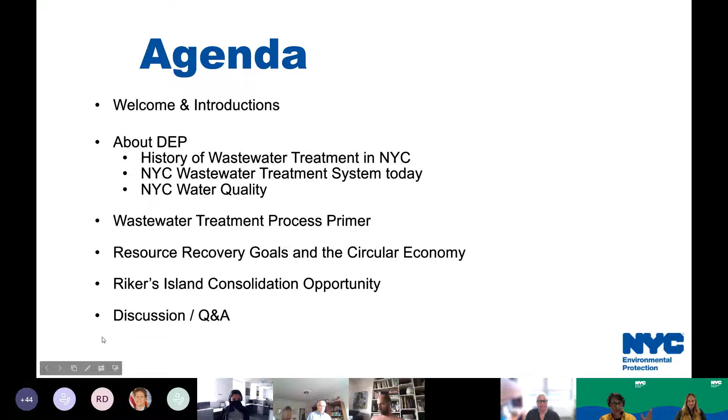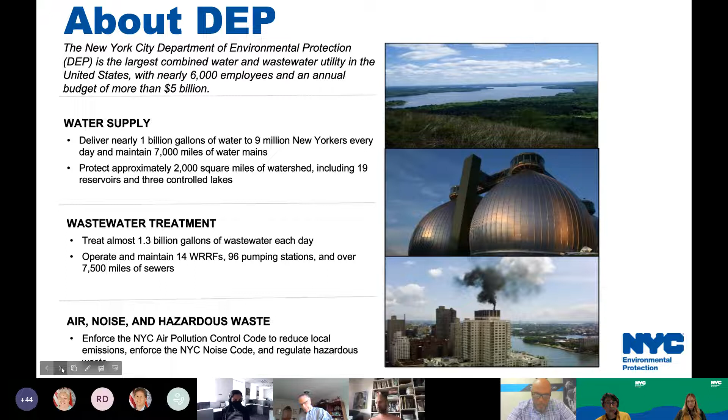Let's go. So a little background about the Department of Environmental Protection in New York City. We're not just about wastewater, and most people know about us as a water supply agency. So we do bring the clean water from upstate to New York City, an amazing feat that's been going on for 150 years, and about 100 plus years worth of wastewater treatment. And that is the niche that we fill here, and I'll talk about that in a lot more detail. But just to round out DEP, we also enforce air and noise and other local environmental codes for the city at large. We're about 6,000 people in total. 1,800 of that is the wastewater division.

Real basic, why do we treat wastewater? Well, first and foremost, we are a public health agency. Here's a short list of diseases that are prevalent if you don't manage wastewater properly. I like this little graph because on the bottom it shows general death rates per population of 1,000: Berlin, Paris, New York. And then New York City actually was a leader in typhoid deaths in the early 1900s. And this is the reason we started to build wastewater infrastructure.

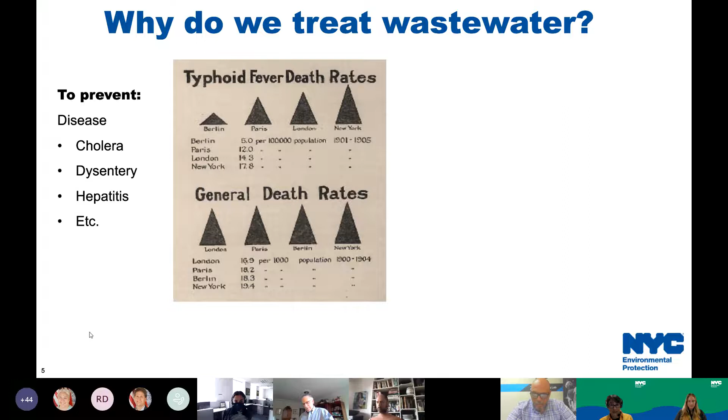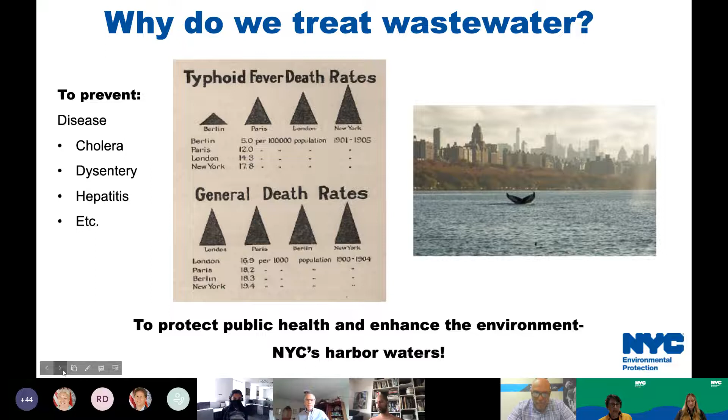And we've taken that further, not just preventing disease, but, if you click, we'll get something else, which is really to protect public health, like I mentioned, and enhance the environment. And that environment, the recipient of this work, has been the New York City harbor waters. There's actually whales and other marine mammals coming back to our waters. It's a testament to the work that the collection and treatment of wastewater has done, in that it has been able to reestablish some of an ecosystem that was lost long ago, to create an environment so that these healthy creatures want to come back and live with us in our adjacent waters.

Okay, so a little bit of history. You can imagine, before there were treatment plants, there were people. And when people lived in dispersed populations, managing wastewater was not that big a deal. People can stay away from a wastewater deposit, so to speak. But when people started living together in cities, it became a problem. Not only did you have human waste, you had horses, animal waste, cows or whatever you may have in a city, and there was a lot of contaminated water because of that.

And so the early sewers, not just in New York City but in any city actually, the original wastewater systems were just to put pipes in the ground and get it away from people and get it to the nearest water body. Totally made sense. Get it away from people.

We determined that it was a disease-causing problem, and that worked great until there was enough of it that the nearest waterway was not a solution. And over time, that polluted water became noticeable and became an actionable item. So in 1897, I believe, was the first time the city put in a treatment plant.

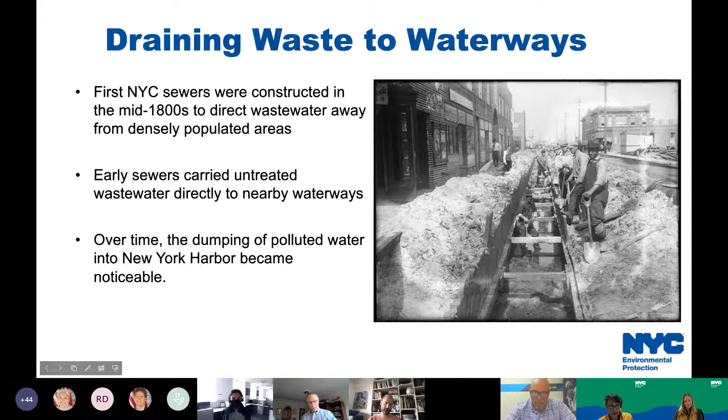So we did put a new plant in 1897, but the first beginning of our sampling of the harbor waters was actually in 1906. And that means we've got almost 120 years worth of water quality data. And the data from back then found numerous dead zones, nowhere close to the ability to support a marine ecosystem the way it does now. So back then, at the turn of the previous century, is really where the city started to think about how we're going to treat and manage sewage.

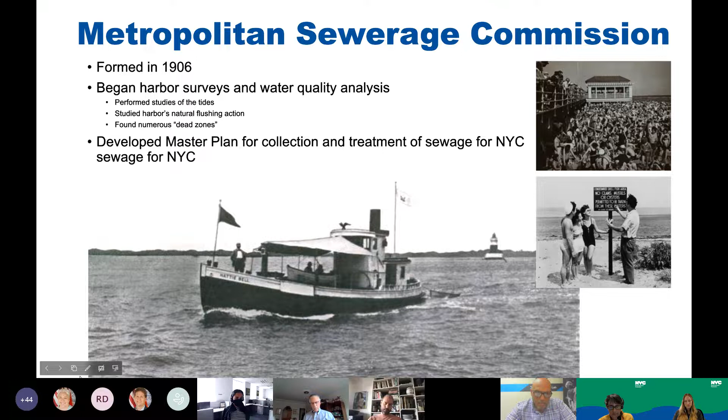And then it became a plan. In 1886, I stand corrected, we started to treat wastewater for the first time. Coney Island, the places where people like to go swimming, was the first target for obvious reasons. The earliest treatment plants were basically retention, a little bit of settling, and disinfection. And that made a huge difference. It helped disrupt the pathways of disease to humans.

So that whole area of Jamaica Bay, or the south end of our service area, was the early target, well before anybody thought about the Clean Water Act or anything like that, entirely driven by prevention of disease and preserving public health.

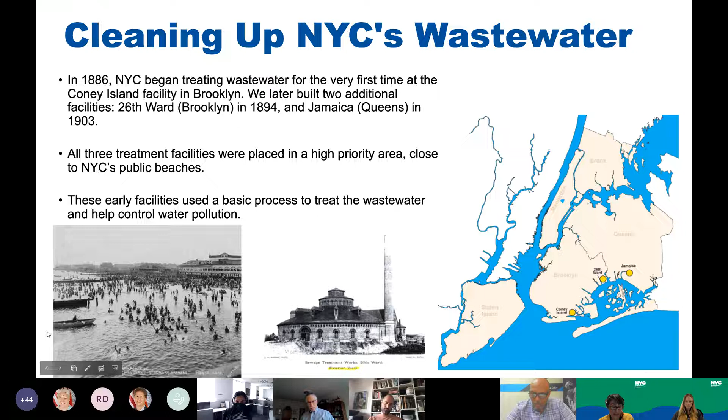I mentioned that the early wastewater infrastructure was just getting the pipes in the ground in order to get contaminated water away from people. And when we built the treatment plants, and this is the same of every city in the world that was big enough to even put drainage in the beginning, the treatment plants were built to collect from that existing drainage system.

And therefore, I'm sorry, I'm hearing some background noise. And therefore, we have a combined sewer in much of New York City, which means not only do we take the flow from homes and businesses, the typical wastewater flow, but about 60% of the city, if not more, is combined in that it collects flow additionally from streets, runoff from streets. So that is a remnant of the collection systems that were put in early.

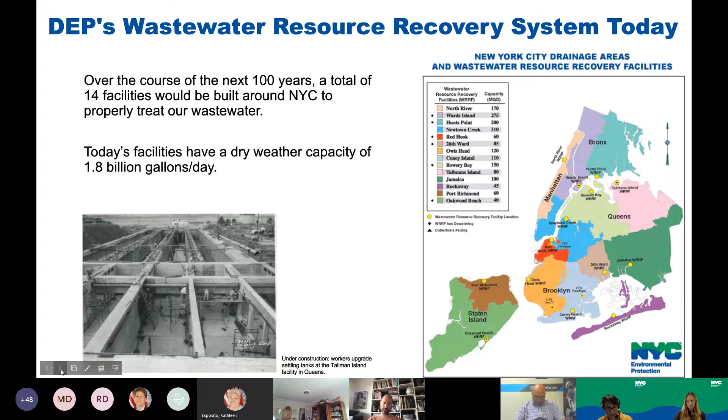So today, I talked about the 14 facilities that we have. We're the biggest wastewater utility in the United States. We have about 1,800 people, except for the fact right now we've got a lot of vacancies, so we're quite a bit less than 1,800. I think we have about 200 people vacant.

We have, and I'll talk a little about dewatering facilities, what that means. We shouldn't ignore the fact that we've got to get the flow to the treatment plants. And so therefore we have 96 pumping stations that are part of that extensive collection system. I should mention that there's over 7,000 miles of wastewater pipes in streets. And we also have a number of regulator stations, almost 500. These are points that actually help regulate the flow and get it to the treatment plants, and also are potential areas where we would overflow if we need to in very high storms.

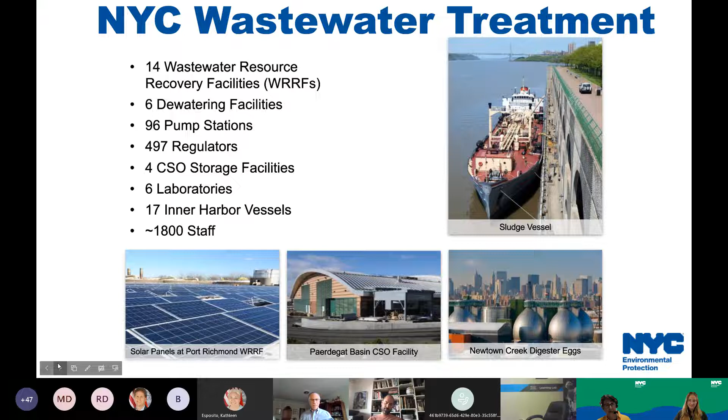We also have a series of combined sewer overflow storage facilities as well as laboratories. And I'll talk a little bit about these inner harbor vessels, these boats that we have in the process. I can't remember if we talk about that later, but I will if it doesn't come up again. But it's a little unique thing about New York City. I say that I have my Navy here, because we do utilize boats to transfer some of our solids to the final treatment for dewatering.

We're blessed with over 100 years of water quality data. If you look at the data from the 1960s to today, you see a big change in fecal coliform levels. There are other parameters we monitor for too, and we could do the same thing for dissolved oxygen, which is a health indicator for receiving waters.

It was a big problem in the 60s. The early plants were targeted to Jamaica Bay for primary contact with individuals. In the 1930s, a number of other plants were built, and finally North River was the last plant constructed, in the 80s. It took a long time for treatment plants to get up and running and change the dynamic of receiving water quality. The Clean Water Act passed in 1972.

The difference between 68 and 85 is the federal mandate to treat wastewater. And it wasn't just to treat wastewater, it was to treat it to secondary standards, which include not just a physical treatment process and disinfection, but added a biological treatment process that actually consumes organic waste from the waste stream. That made a huge difference between the 70s and 80s, and you see the improvements continue over time.

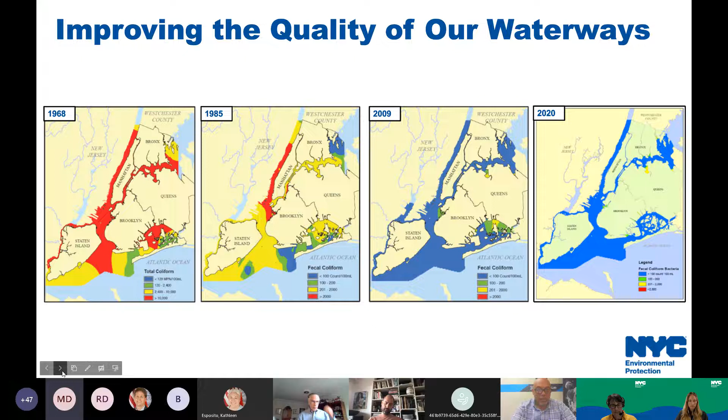So let's get into the fun stuff. My goal here is to make all of you wastewater enthusiasts by the time we close this Teams meeting.

Like I told you, I asked people who's used the toilet today. My goal in life is that everybody knows what happens after they flush, because it's important for your public health. It's important if you understand what you're paying for in your rates for water and wastewater management. It's important for you to appreciate what is done, and it's important for people to understand that we take care of it so you don't have to.

For everybody on this call, if you have not actually visited an operating wastewater resource recovery facility, you are all welcome to do it, and we will set you up with a tour. We have 14 to choose from. Newtown Creek is the one we use most frequently because it's kind of set up for visitors, but it's important to get the look, the feel, and the smell of a wastewater treatment process.

I'm going to talk a little bit more about odors in a minute, but I wanted to give you the very high-level description and get into a little bit of cool detail.

So we are a factory. This thing that sits in the middle is a factory. And like every factory, we take in raw materials, inputs. Our inputs are residential and commercial wastewater, industrial wastewater, and stormwater for a big chunk of the city. That goes to this treatment plant, which is the processing manufacturing facility.

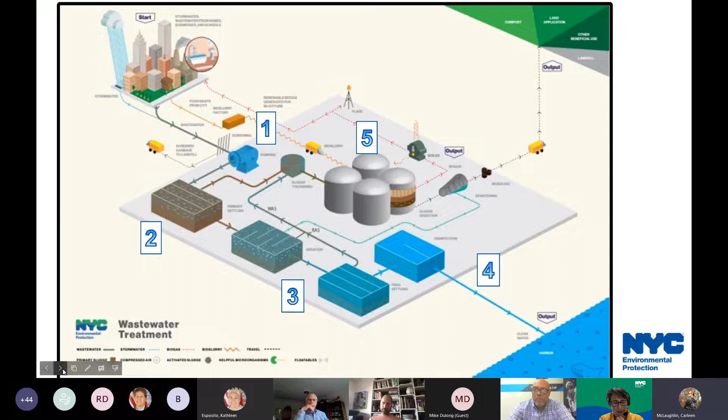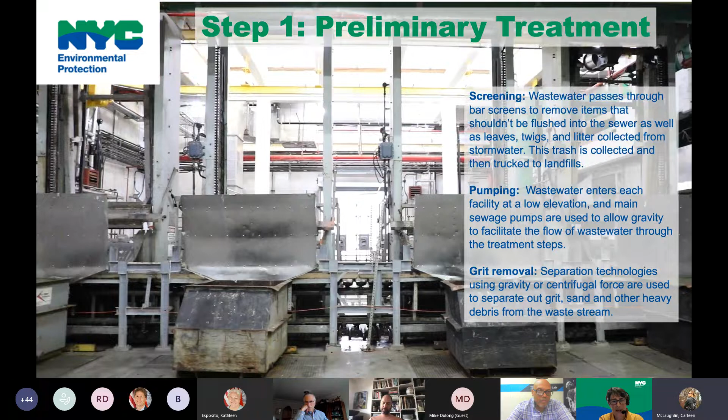Okay, so I don't think we have sound, which is probably a good thing. I talked about that first step, which is screening. We have bar screens, and the bar screens are basically that - they're bars - and then we send these rakes down.

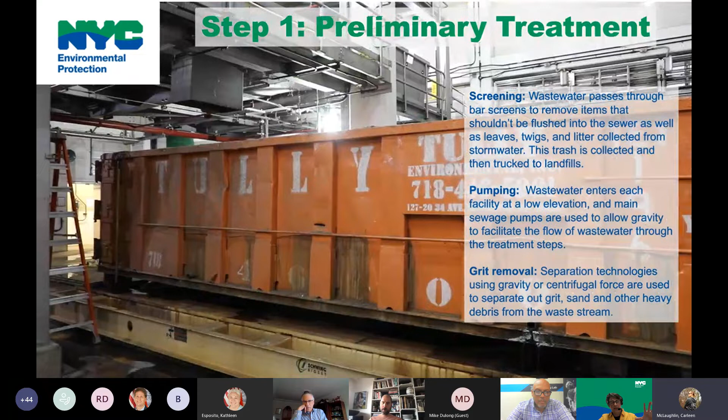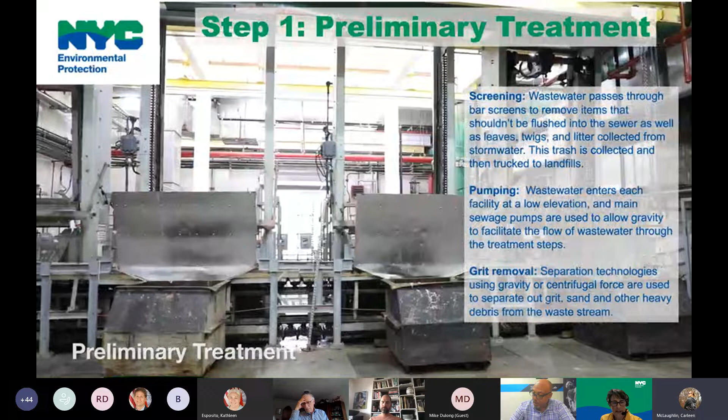This is the influent that comes to this low-level tank. There's the bar screens, and the rakes will come and scrape the debris from the bars and dump it into this conveyor system. And you just - if you look closely - it's impossible to miss. That is what gets stuck in the screens.

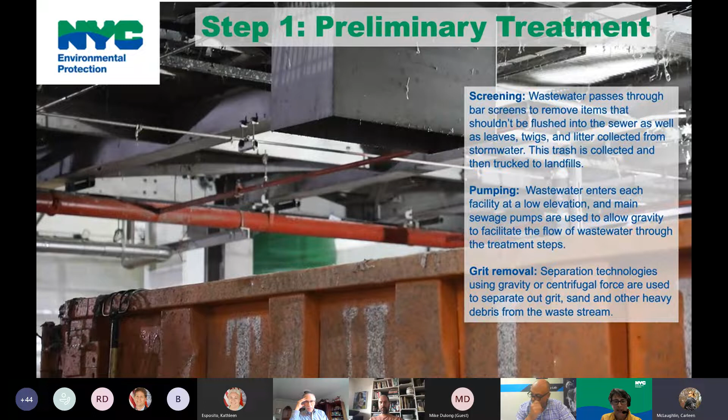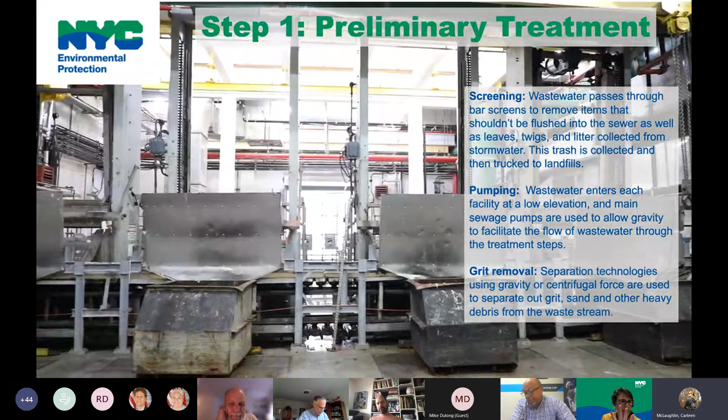80% of that is quote unquote flushable wipes. If you learn anything from our time today, you and all your friends and family will only flush 4 different things. Okay, everyone paying attention? Get your pens out: poop, pee, puke is okay, and toilet paper. No other kind of paper.

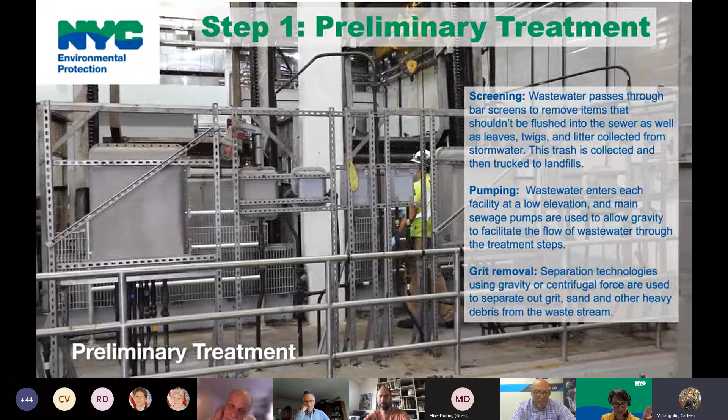But Pam, does facial tissue break down just like toilet paper? Guess the answer - no. Paper towels, no. Baby wipes, no. But it says flushable on the box - they lie, it's not flushable. It gets out of your toilet, but it does not break down in the system. We're having a big fight with people who produce flushable wipes.

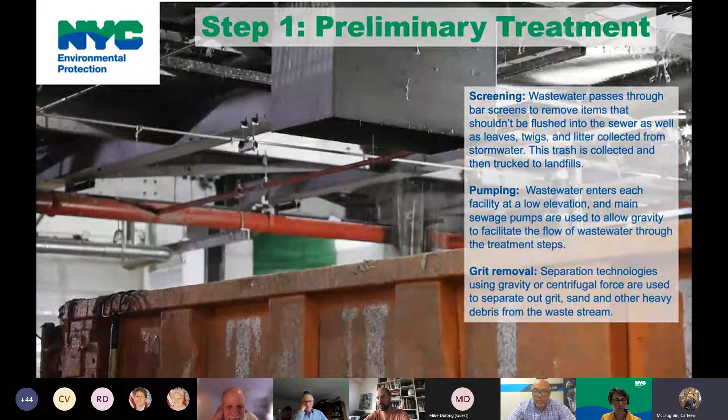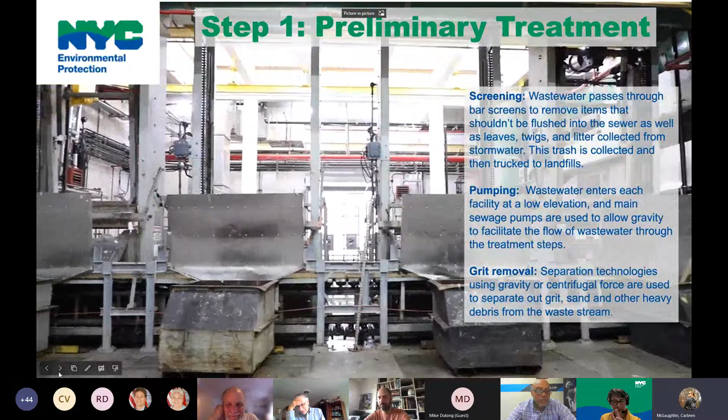So enough of that. Y'all need to see this in real life, and only flush the 4 Ps. If not, I will send you to this treatment plant to pick out everything you flushed. It is not on that list of 4 things.

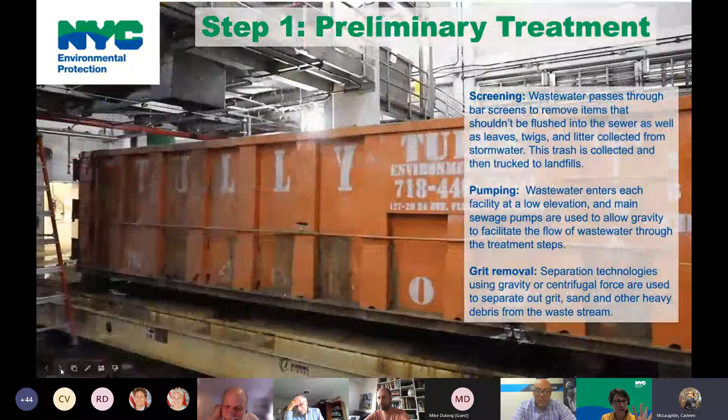But Pam, what about floss? Is floss on the list of 4? No. Floss gets tied up with this stuff. Okay, I'm a wastewater person. This stuff is nasty. Don't do it.

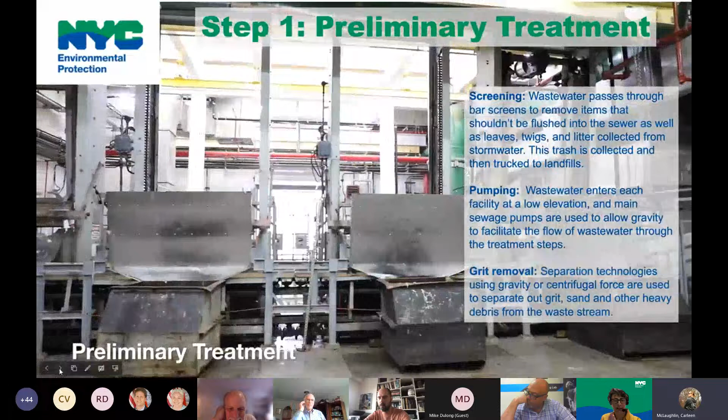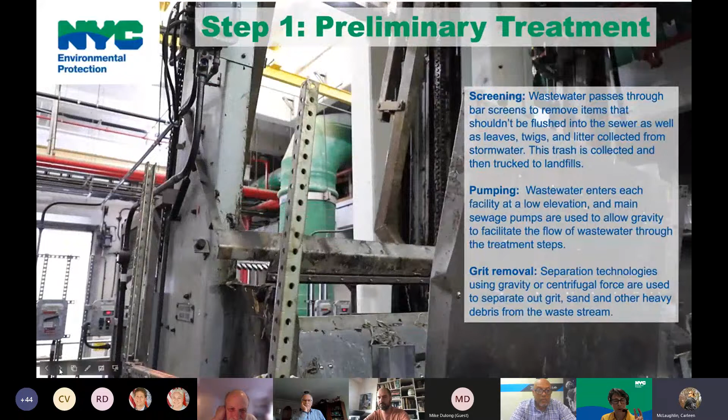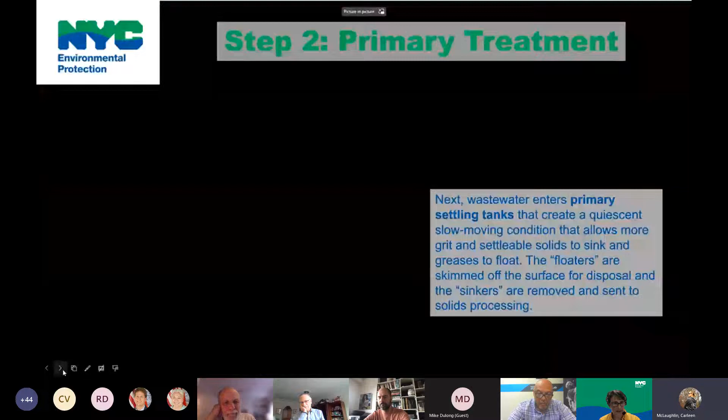I think it goes to step 2, next slide. Those videos are working well.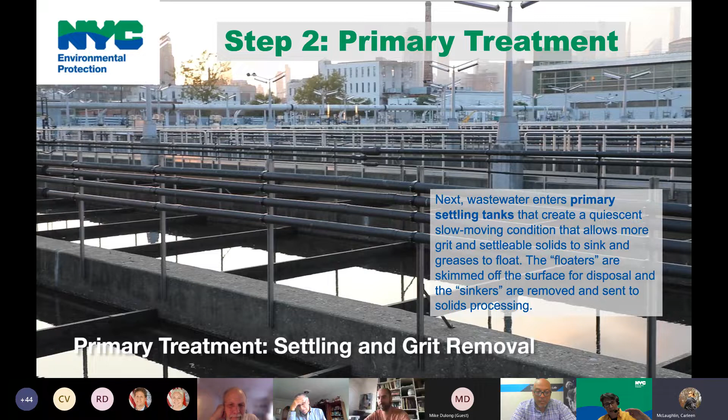I mentioned this, primary treatment. This is the first stop, and they're just long, narrow tanks. It's a slow-moving environment that allows the greases, the floaters, and grit, settleable solids, inorganic solids, to sink to the bottom of the tank. Then we have these scrapers that move along and take out, move the grease off the top and the grit off the bottom. That little end is the grit removal. It's not really primary treatment.

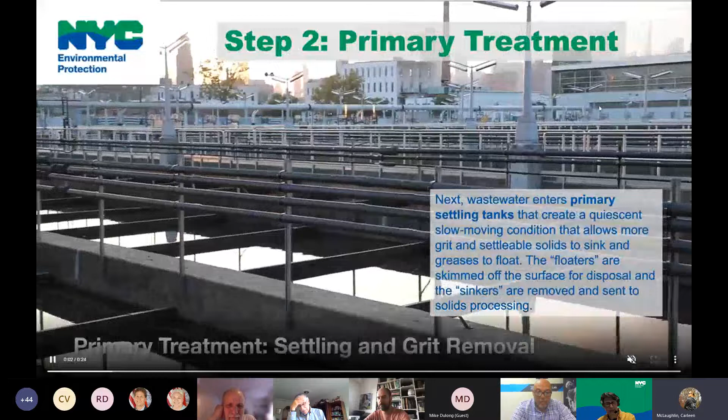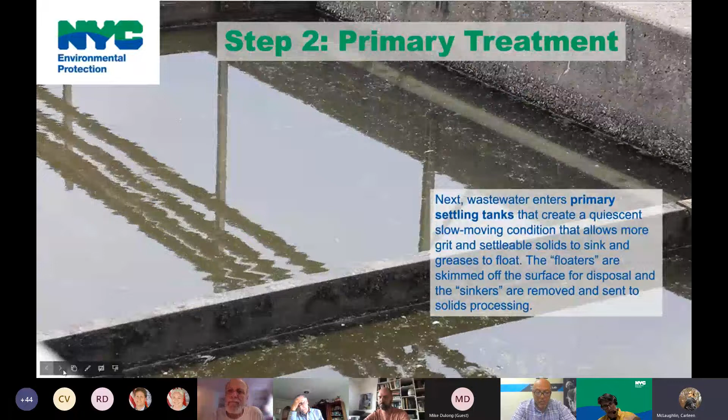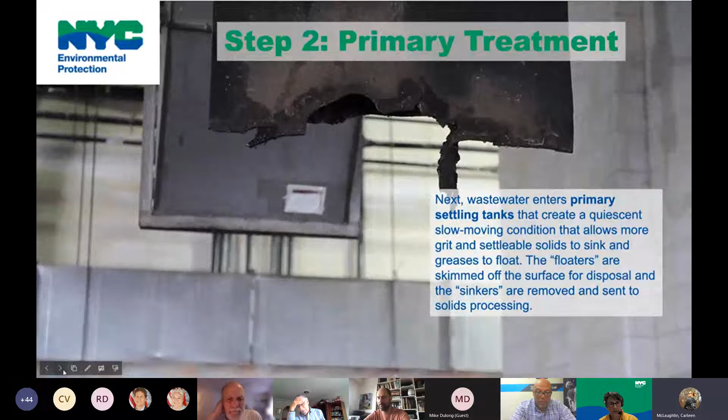But anyway, when I talked about those first plants that were built in the late 1800s, they basically were this. They were like simple primary, probably a lot smaller than this, a primary treatment tank with disinfection that did an okay job for the day when they put those in. But next slide, they're more primary.

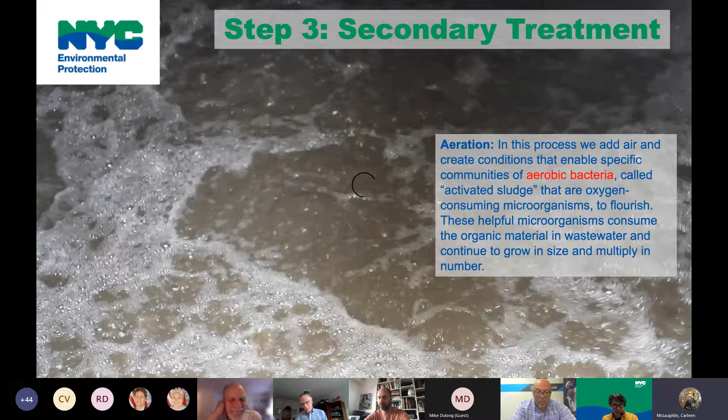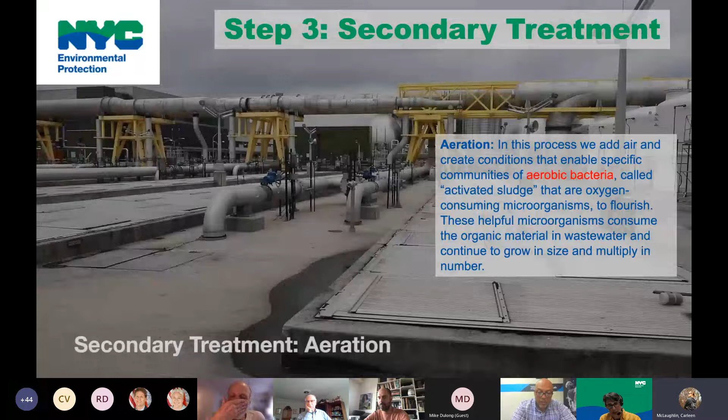Okay, so now we're getting to secondary treatment. This is what's amazing. Think about this: if a bear poops in the woods, what happens? There's soil, there's nutrients from the leaves falling and the foliage around it, there's oxygen. Over time, depending on the conditions, that poop becomes fertilizer for the forest. It's brilliant. There's nutrients, there's air, there's bacteria.

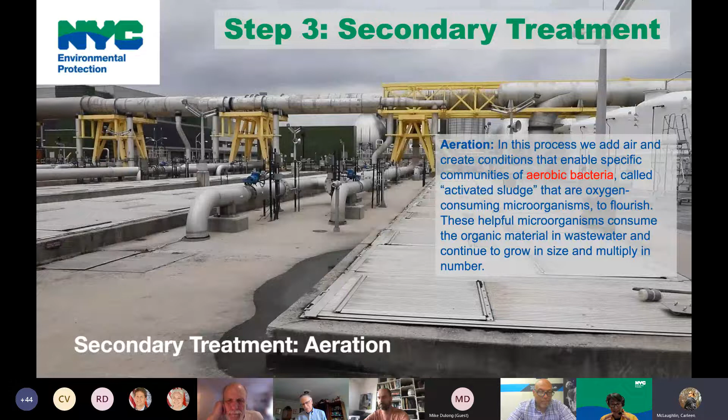So we basically take those same ingredients and control the environment through air, through retention time in the tanks, through the concentration of microbiology in the tanks relative to the food, the waste coming in. We do that process just like a bear poops in the forest, but in a matter of hours instead of days or weeks, ultimately ending up in the same place: we take that organic material and break it into a usable compost and a green gas.

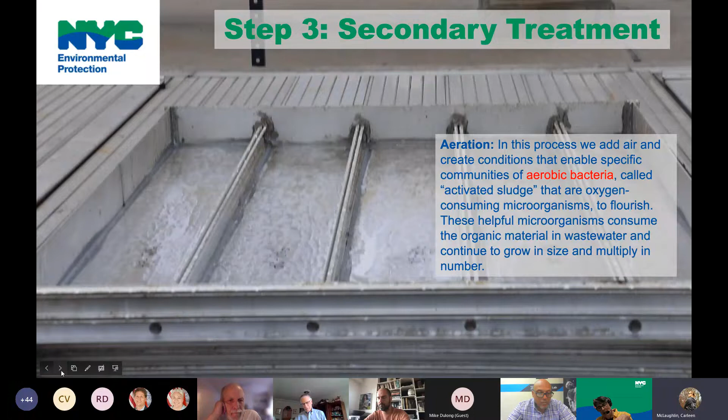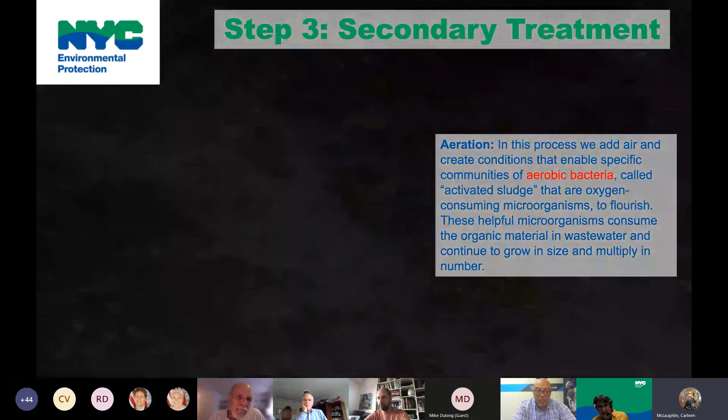So this is really the heart of the secondary treatment process. It's quite amazing when you think about it, people being able to figure out that we could speed up Mother Nature by engineering it in.

Next, I'm going to try and speed up because I don't know if people are getting bored. This is a real cool picture of the bacteria that work for us. Again, we set the conditions so that these beneficial bacteria show up and do the job. I don't think the video is working, but it's very cool.

When you go to the treatment plant, you should also go to the lab, and we should send you a video of this. This is the bacteria, we call it sludge, activated sludge, that mixes up and treats our waste. Next.

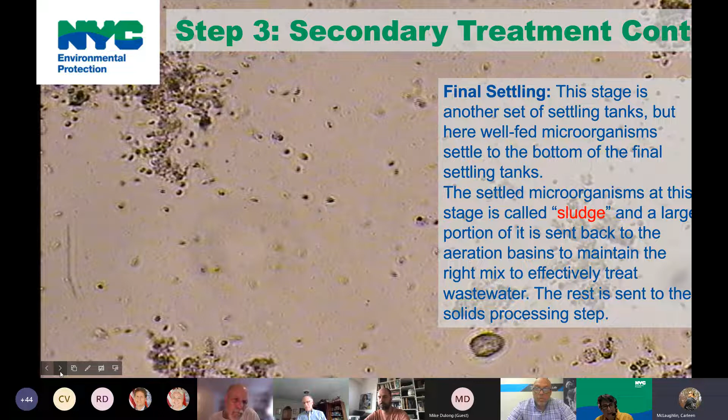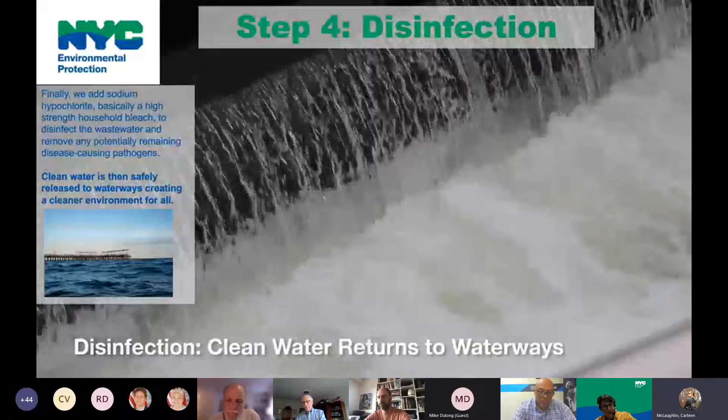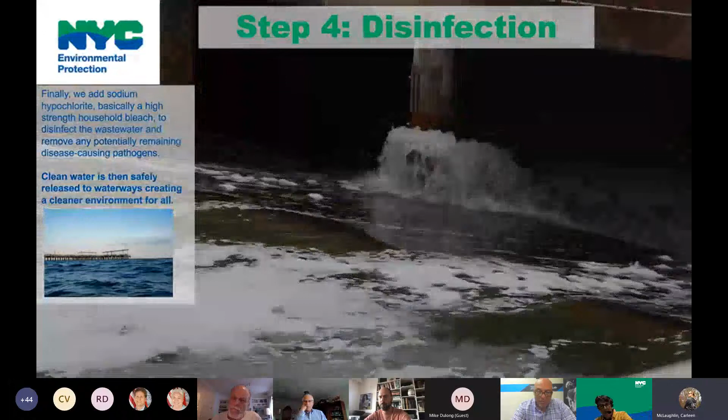And then we go to disinfection. There are some pathogens that may be remaining in the final water. After secondary treatment, we settle it out and take the water off the top, which is this clean stuff. We just add a little household bleach, basically household bleach strength stuff, and send out the final clean water. The solids off the bottom of final tanks either go back to the secondary aeration basin to use the bacteria over again, or go into the solids treatment process.

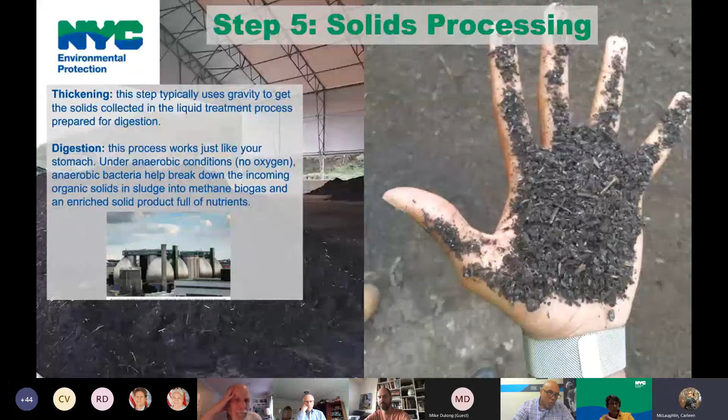Next, I think we're going to talk about solids processing now. These are digesters. If you've been to Newtown Creek, you've seen them. If you've driven on the LIE, you've seen them. These work just like your stomach. There's no air in them.

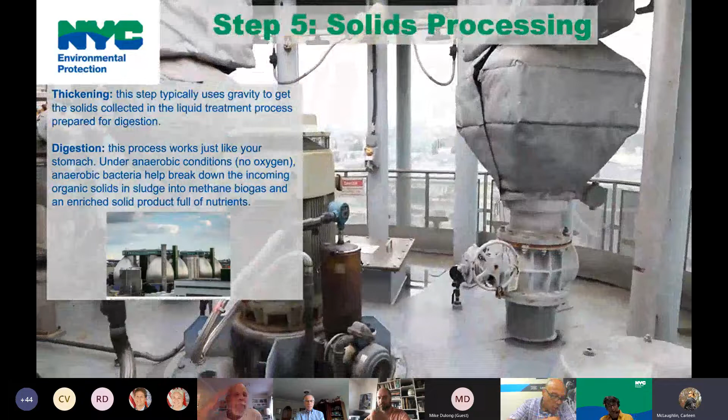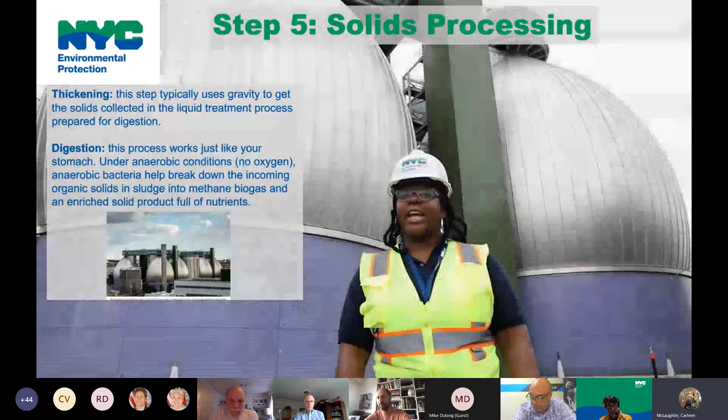We create another environment where anaerobic bacteria break down the solids, and from there we create the biosolids product as well as methane biogas that can be used beneficially. Two major components to our sustainability and energy production. Next.

Oh, I talked about the boats. And why do we have a Navy? So...

I'm not going to talk about the past, I'm going to talk about the present. When we put in the final step for the biosolids, which is dewatering, we get this fairly liquidy looking biosolids out of the digesters. This needs to be dewatered, and then we make a cake. It's a very soil-like product, and that cake comes from centrifuges. We need to get the biosolids from the digesters to the centrifuges. By economy of scale, there are only 6 plants that have that dewatering final step.

So we have to transfer the digested solids from the digesters to those final plants. Some plants transfer those solids, like the ones in Staten Island and also in Jamaica Bay, by pipes. The sludge from Jamaica Bay treatment plant goes to 26th Ward, for example. Some of them, we put the sludge on boats and transfer it from one plant to another. For example, at Newtown Creek, we load a boat there and take it over to Wards Island, and vice versa. It's a really amazing logistic marine environment deal. I think we're the only one in the world who uses these boats, and it's working out fine. It's a challenge, especially with 14 plants and only 6 dewatering facilities.

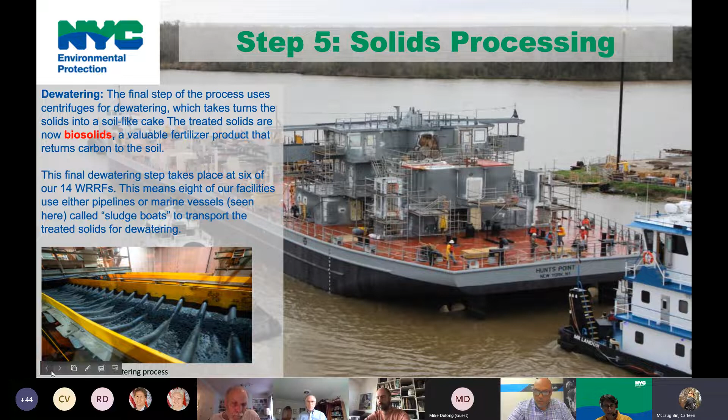Next, what do we got? Oh, here's some real fun stuff. We talked about wastewater resource recovery. You've seen this already, but I want to emphasize a couple things.

One, food waste. Food waste is digestible in a digester. We have a connection with Waste Management. They take food waste from various sites in the city and create a slurry that goes directly into our digesters. At Newtown Creek—can you step back a little bit?

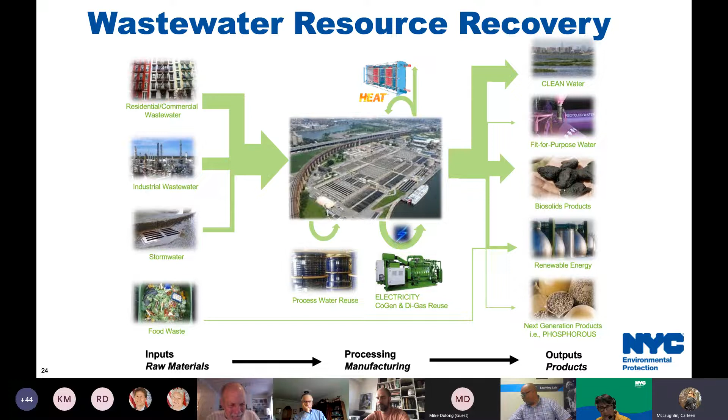Okay. All right, maybe, okay, but let me go to the next slide before that. So we're going to talk a little bit more about food waste. But the other component I want to talk about was the green energy production from the biogas in the digesters. I think there are more slides on this, so I'll just go—Carleen, you were right to advance that slide. Let's talk more about food waste.

Source separated organics are collected by DSNY. Commercial facilities in the city are also mandated to separate their food waste. We're trying to keep food out of landfills—there's lots of good reason to do that. I'll let DSNY explain more about why, but it's best not to put food in landfills. If we separate them from the waste stream, we work with Waste Management, and they make a slurry that goes directly to our digesters.

I'd like people to think about this for a minute. At Newtown Creek we have about 500 tons—actually it might be as much as 1,000—of excess capacity in our digesters. Let's just say 500. The city has 14 sets of digesters because every wastewater resource recovery facility has digesters. Not all of them look as cool as the Newtown Creek digesters, so people think they're just tanks, but they're doing the same thing. We have 14 sites, and of that, 75 individual digesters.

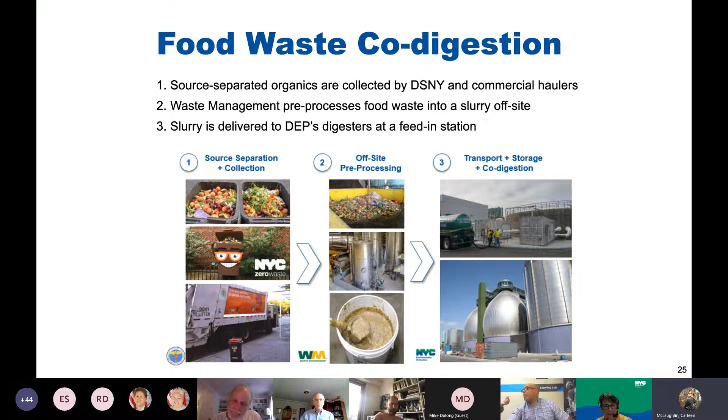So if we invested well and invested right throughout the city, we could take a lot more food waste. Currently, Newtown Creek is taking about 200 tons a day, but it could take up to 500 or 1,000 tons a day of food waste. The city produces about 2,000 tons a day of commercial and 2,000 tons a day of residential food waste. I know it's logistically challenging to get people to separate their organics, but within the city itself we could build enough digestion capacity to take 100% of the city's food waste. And that's freaking amazing, because we're taking the resources locally and using them locally and creating the benefit locally. Next slide.

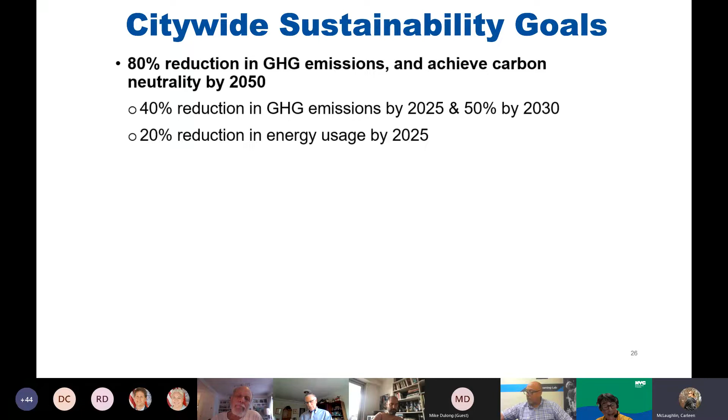Okay, so why are we doing this? We're doing it because it's the right thing, and it's best business to utilize our resources from wastewater to develop green gas and utilize it. But we're also required to. I love that we have pretty aggressive carbon and energy goals.

Here's the list. These came from planning in the city over the last 10 years or so driving towards this—I can't remember exactly when the last goals came out, but under the last administration these came out: 80% reduction in greenhouse gas emissions and achieving carbon neutrality at the wastewater resource recovery facilities as a network by 2050. We have a 40% reduction target by 2025 and 50% by 2030.

A 20% reduction in energy use by 2025. And then we also have another goal to meet energy neutrality—you can read this list of things here. It's a matter of increasing efficiency and increasing the production of green products.

Challenging. And we have made progress in this direction to date, but there's much more intensity that needs to happen.

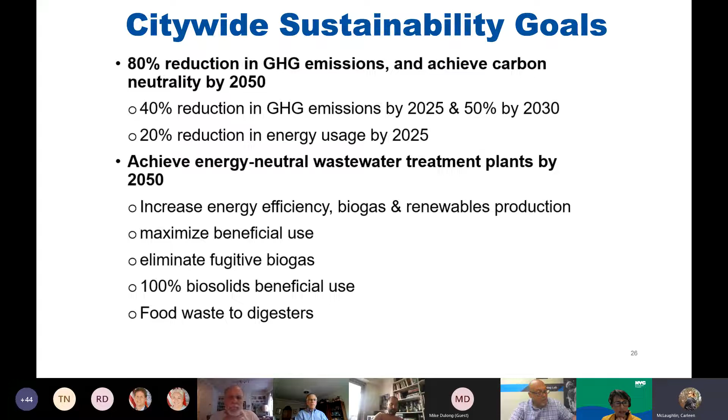So this will go into a little bit of the strategies for carbon and energy neutrality. For all these facilities, we are using the gas internally to generate electricity to run pumping systems at North River, for example.

We are installing solar at treatment plants where it can be easily retrofitted to the existing infrastructure. We have 1.2 megawatts down there at Port Richmond on Staten Island. Wards Island there's a 5 megawatt solar photovoltaics coming in, I believe in 2024. So very soon. There's also a study of how we can expand that throughout the agency.

Improving our process equipment. A lot of our equipment is old, and as we upgrade, we look to put in equipment that does the same performance at much less energy consumption. Utilizing our biogas, 100% to beneficial use. We're not quite there, but we're getting close to that achievement.

Putting gas back in the grid that can be used for local heating and even cooking in people's homes. As the city electrifies, there will always be a need for a certain amount of green gas for niche markets like hospitals and other places where they have to have combustion in order to sterilize equipment. The solids generated at treatment plants will always be generated as part of the process, and we have the opportunity to utilize those green resources. I also mentioned food waste co-digestion, which is something that is ongoing.

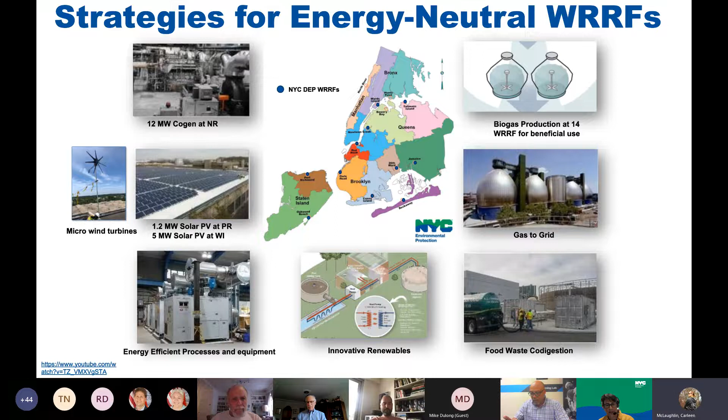Okay, more about biosolids. Biosolids are magic. It is a very valuable fertilizer. It is highly regulated, more regulated than what you're going to find if you go buy steer manure at Home Depot. Very high level of nutrients.

They can be used in forests and farms and actually sequester carbon. It's a huge component to offset the carbon of an industry. When I worked in Seattle, we actually ran our wastewater utility at carbon neutrality because of the value of carbon sequestered from the green gas production, but also from the land application of biosolids. There's a lot of science behind this.

It's really cool when you look at it. We used to set up these plots with farmers where you had biosolids product, regular fertilizer, and no fertilizer.

And the biosolids product is much more valuable than the inorganic fertilizer, because not only is there the nutrient value, but there are micronutrients that you don't get in inorganic fertilizer, and the ability to retain water in that biosolids matrix is so much better that the farmers don't have to irrigate as much, and it just retains a better soil matrix for those plants. What else do we have here?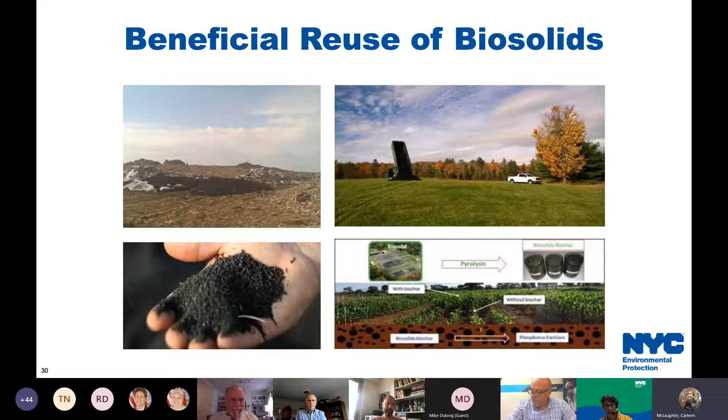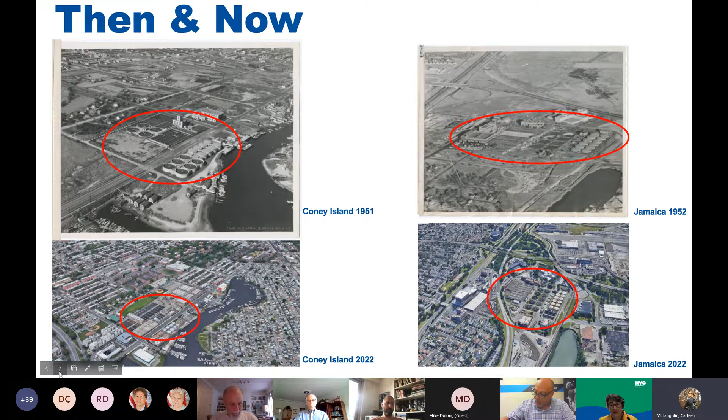Pam, if you don't mind, can I just point something out quickly? In these images, the rectangular structures you can see, especially in the top images but also in the bottom ones, are the primary and secondary settling tanks we were talking about earlier. So that gives you a visual of how large those are and how large these facilities are. Yeah, that's a good point. First of all, the scale is challenging because the pictures aren't the same scale. The plants actually take up more space than they did back then because we have extra tankage that was not required in the early days. They are very land intensive, and with the need for housing, there are people living right next door to us now. These are industrial processes that I'm talking to you about.

I'm confused if somebody's asking a question or something. Let's hold off on questions till we get there.

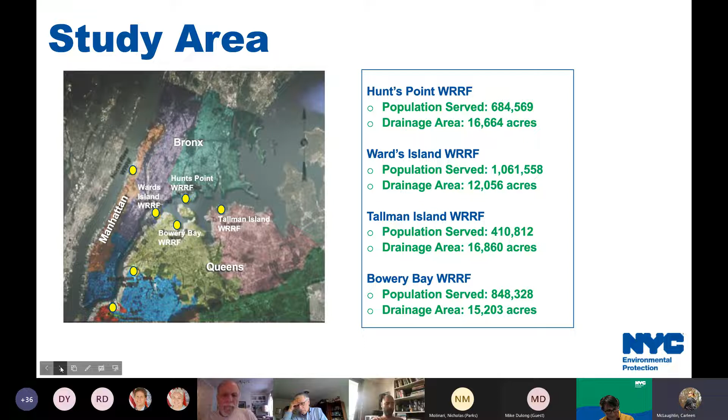So there is what this group is interested in, which is we are at a point of looking at consolidation. It is really a generational opportunity that will, if it pans out, allow 1 up to 4 of these wastewater resource recovery facilities to have some of their operations relocated to what's going to be freed up at Rikers Island.

So the advantage, just strictly from a wastewater professional perspective, is we have a new geographic area, which would provide a clean slate, a clean canvas to create wastewater resource recovery technology that would literally be impossible to get to by modifying our existing plants in any reasonable future. It would really be able to leapfrog us from an old technology that we're trying to modify to technologies of this century and intentionally build that for the communities, for the entire city, for 100 years to come. So it is an incredible opportunity just strictly from the wastewater performance and treatment process.

There's a lot more that goes into it and a lot more that is very valuable, which is this potential to modify those existing facilities should some of the treatment processes be moved to Rikers Island. Now, you saw the drainage areas that I showed you. We're still going to have to get the flow from these existing points where all the flow is discharged now to the island. So there needs to be retained some conveyance capacity at each of these sites, some treatment capacity, some opportunities for advanced treatment capacity that we currently don't have, particularly potentially for combined sewer overflow control.

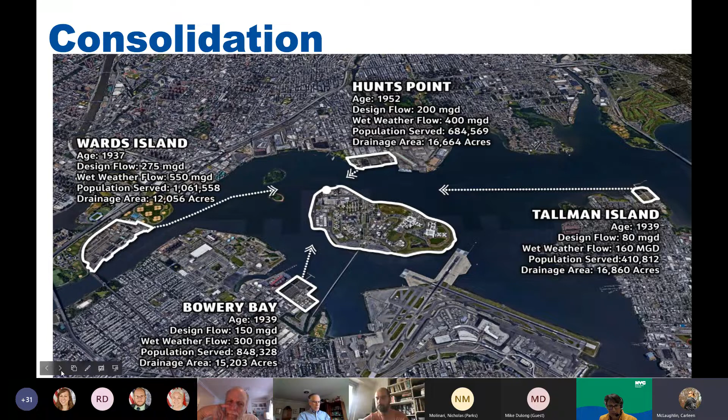And I think this is my last, well, no, there's one more. Let me go to the next slide and I'll have some statement at the end. So the consolidation feasibility study is being led by Kathleen Esposito for the wastewater resource recovery side. There's a parallel effort going on for energy, which I think Kathleen's going to mention. It was driven by the wastewater side. It's the right thing to do. And by the way, there's a local law that says we have to do it. So that's been giving us the impetus and the support to move forward on doing this analysis.

Now, like I said earlier, from the wastewater side, it's a generational opportunity, but I want us to all think about this as a social opportunity, a triple bottom line opportunity, which is environment, finance, social equity. And that is really the driver for this project. It's really a community project at this stage to analyze it and see where we might end up on that trajectory in terms of affordability, reasonability, and technical ability for it to be established.

So this is the layout. We're somewhere in the process. I think the feasibility completion is scheduled for October 2023, and it's a very exciting time to be in our industry. And I am glad that we have 50 people excited about this and participating and being partners with us as we move towards this feasibility study analysis.